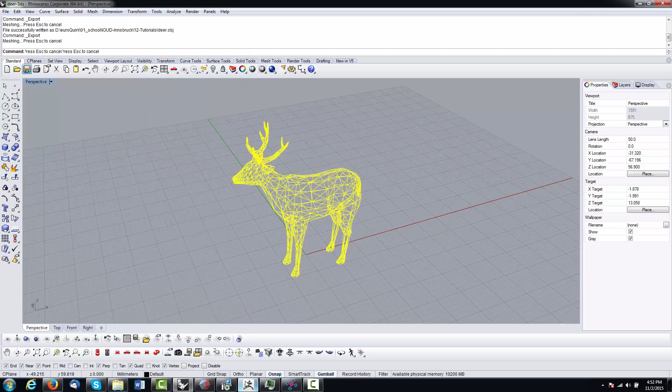We're going to export the deer as an OBJ to bring it inside ZBrush. It's inside ZBrush now. Simply go to the right corner, import the deer. When it comes in, hold down the center with the left click of the mouse and drag it to the middle.

Now you're going to want to edit. Either click this button up here or hit T. Now we're going to remesh this guy at 50, down to 0 polish, and remesh. Now we see we have a voxelized deer.

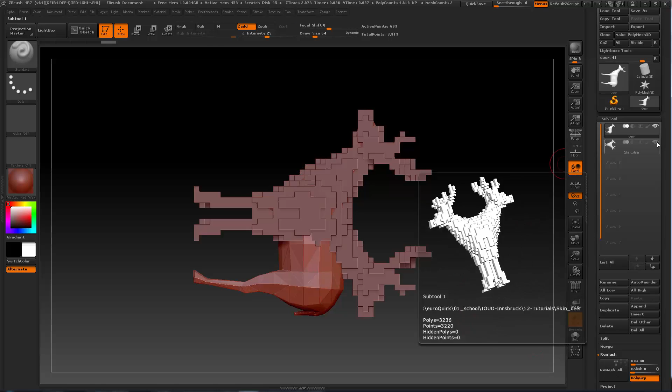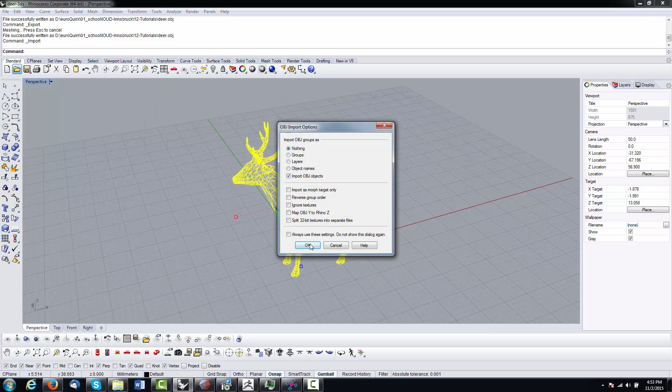So this is our voxelized deer. We're going to export him back out. Deer skin's fine. Move it back into Rhino, import the new deer, and delete the old one.

Now we're going to go ahead and check him. Okay, so we have some non-manifolds - we have some problems with the model. We're going to move him over and export him out now as an STL.

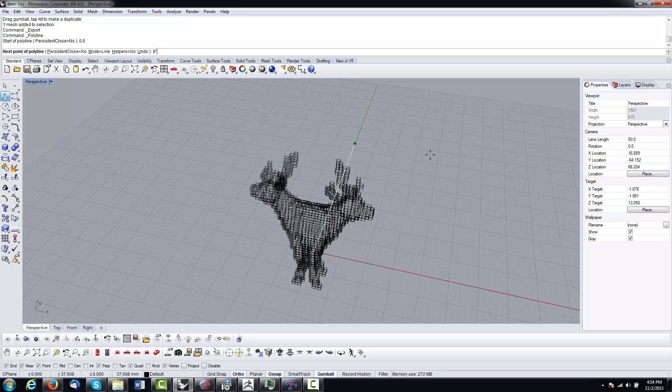Actually, before we do that, the first thing I'd like to say is you need to figure out the size of your 3D printer. I'm going to use the dimensions of a DaVinci, which is 8 inches by 8 inches by 8 inches, and then it is 8 inches tall.

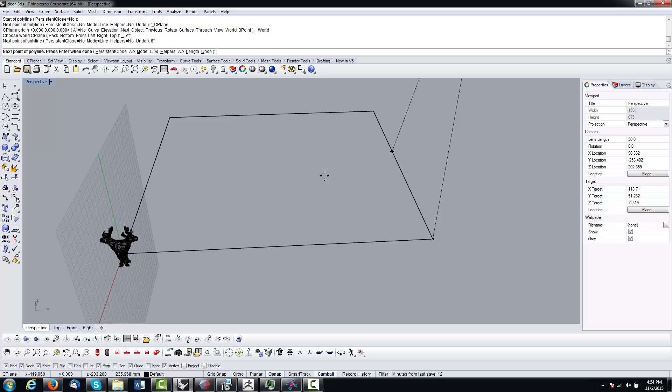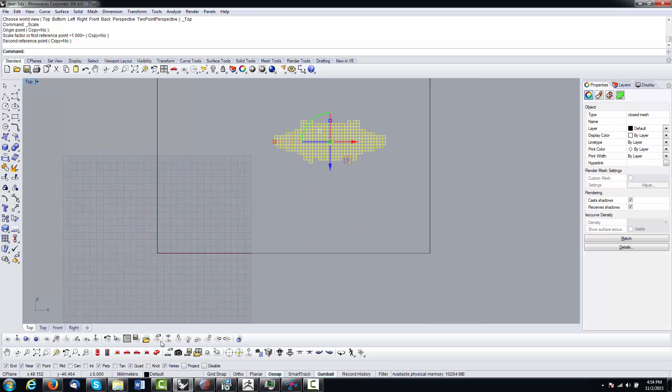So that's basically the size of our 3D print space, and we're going to scale him up. In the beginning, guys, I don't want you to do very large models, so let's say we're going to scale him by his dimension to about that big, so he'll sit pretty much in the middle of the 3D print.

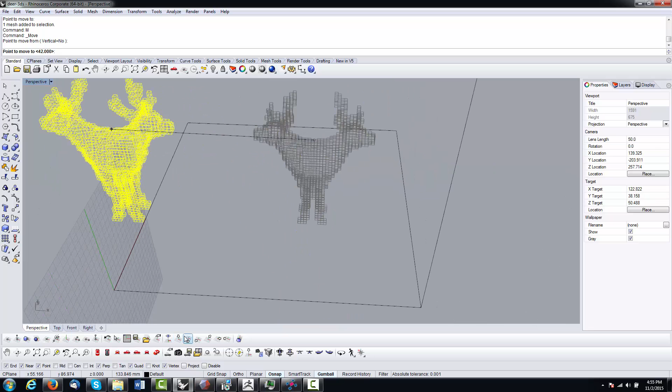We're going to move him up to the 0 plane. We can move him in the middle - midpoint, there we go. So now he's ready to be exported. It looks like he needs to be in the middle over here a little more.

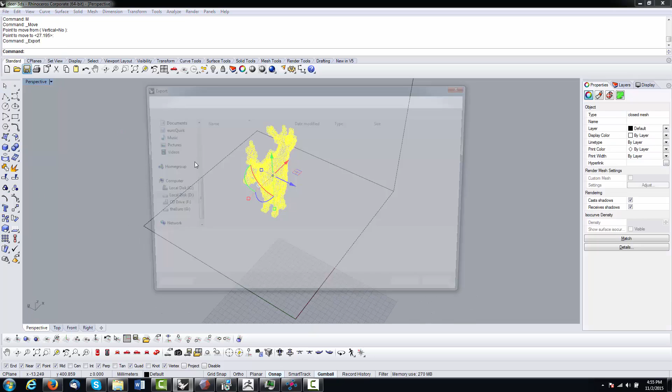Now we're going to export him out of here as an STL. Just call it deer print.

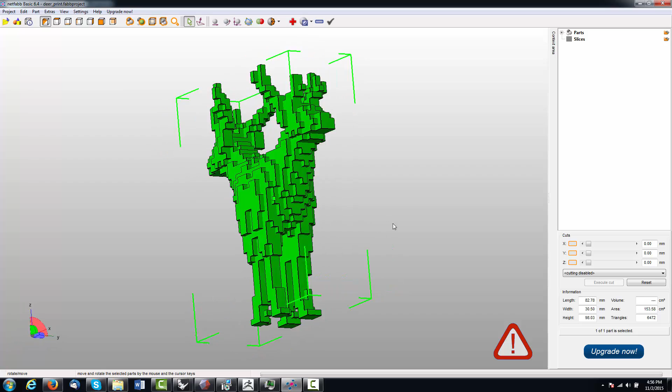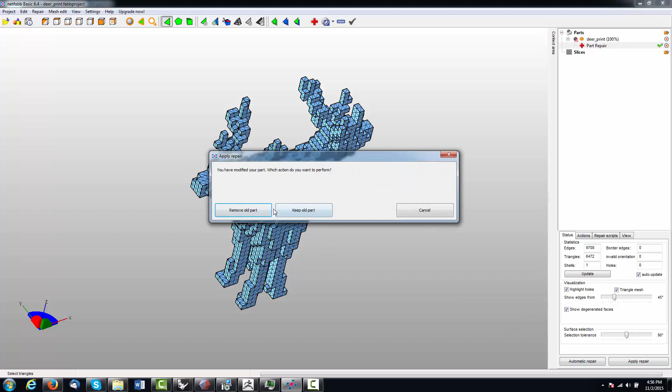Up here we're going to go to repair, and it's going to come up on the right, and we're just going to hit automatic repair. Default's just fine, and see, it looks like it repaired a couple of things. Apply repair, remove old part. Okay, so now this is the repaired piece.

Now what we're going to do is also slice him a little bit. You see this thing over here cuts. If you look correctly, you can see where it is, and you're going to want the middle of the model. I think we're going to slice it in half right here, so we have two sides. Kind of want to think about where you want to slice it.

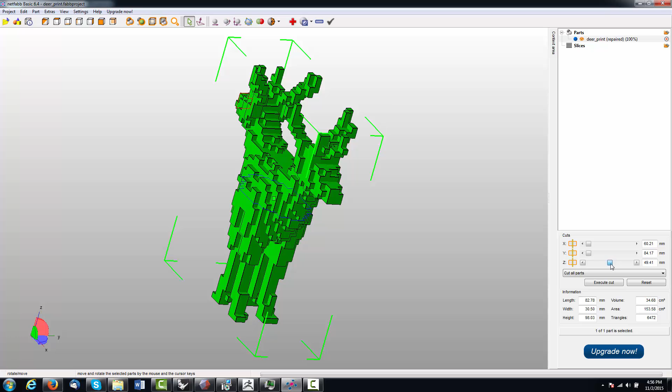Execute cut on the Z plane right there, and then now you're going to apply the cut. Now as you see up here in your parts, you now have 2 slices of a deer.

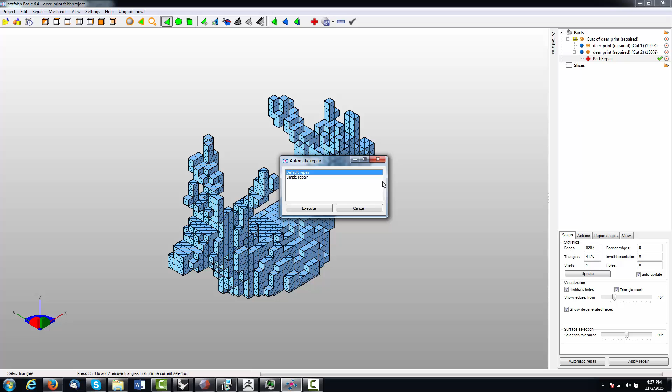Now you're going to need to rerun the repair on this guy too. Auto repair, execute - alright, that one's good now. Remove old part, same thing on the other one. Auto repair, execute, apply repair, remove old part.

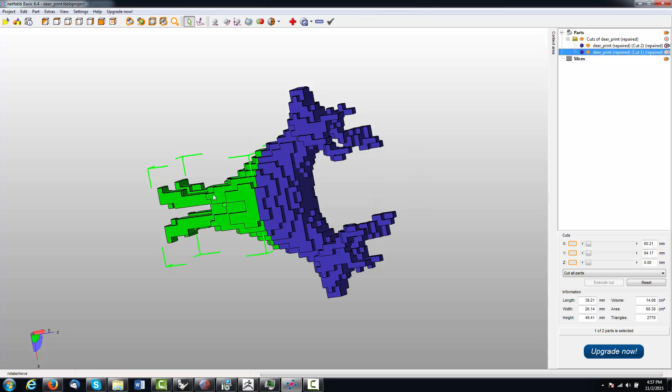Now we're going to export those parts out. Part, export part as STLs. It's going to go ahead and optimize, export, and do it to the other one too.

Optimize, export. Now we're going to open up Meshmixer. We're going to import part 1, the cut 1 - there it is.

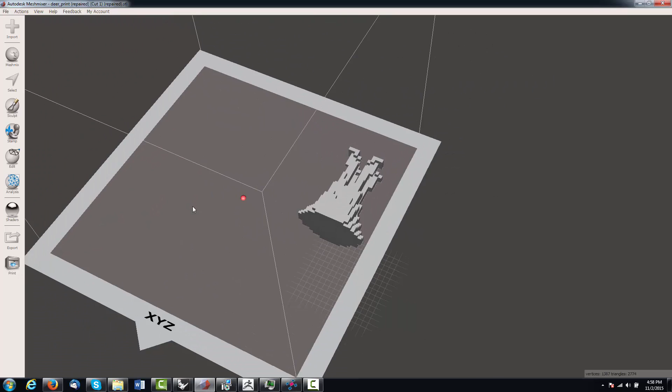Now we're going to import the other part, part 2. There we go.

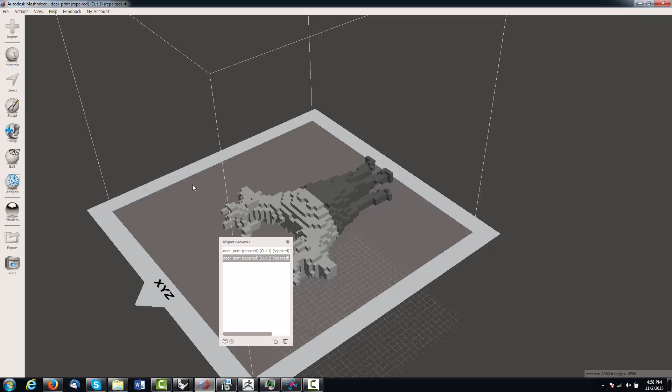Now what we're going to do is go to print. So now see, I have my print set up. You can set up your printer in here under preferences, under printers, you can pick your printer that you're using or add a new printer with the default of the system. But we're going to hit print.

See, now it's fixed in the middle a little bit. On the first one, we're going to see they're both repaired, it seems. Both models seem repaired. We're going to transform, move to platform, and hit done. And do this to the other one.

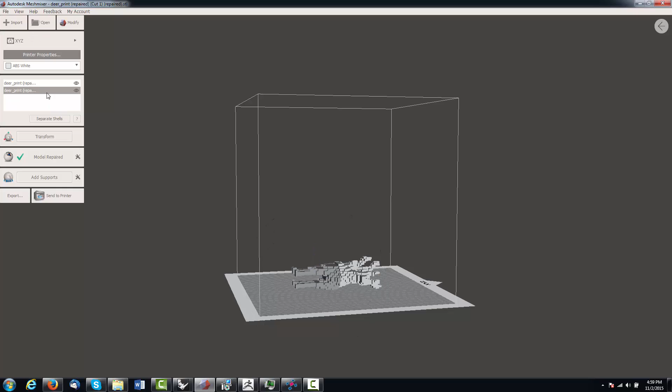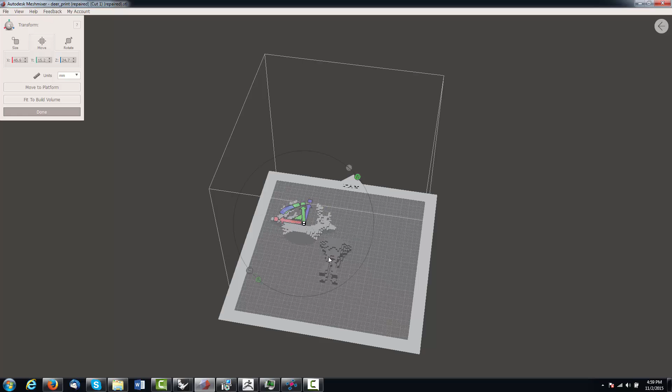Move to platform. Now they need to be moved apart a little bit. You can do this by the toggle here a little bit, and then we can move them over. You're going to always want to stay within a certain distance away from each other. There we go, done. They're both separated on the platform.

Now what we're going to do is add supports. It's going to add - you're just going to have to sit here and let it wait. Give it a second. What this does is it does fairly good supports that are stronger than the supports you'll get from any other software. They're absolutely a lot better.

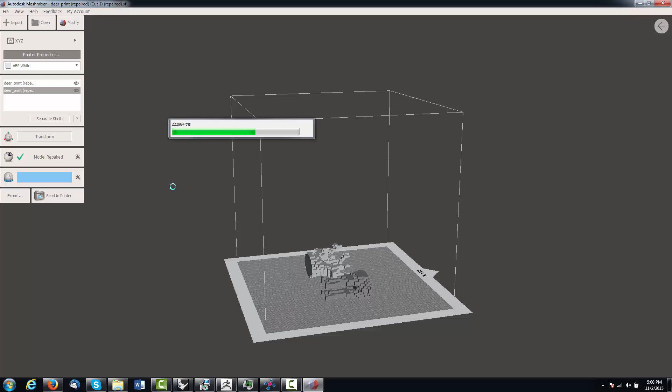In certain cases, if you print this with a raft, you don't need the other support parts - you can just use these alone. And see, we have here the supports that came in, and that should be good for that one.

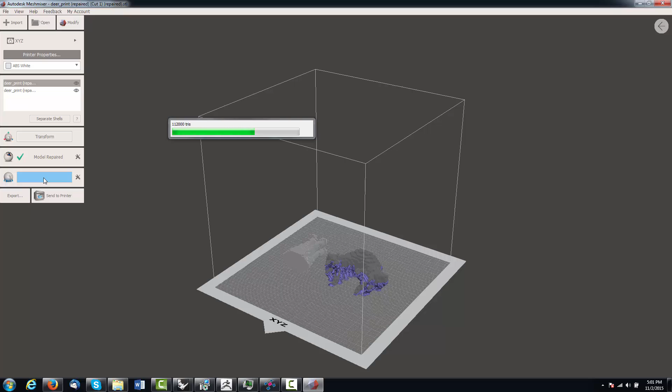Now we're going to do that same thing to the other part. Add supports. There we go. Alright, as you see now, both of the parts are ready to go.

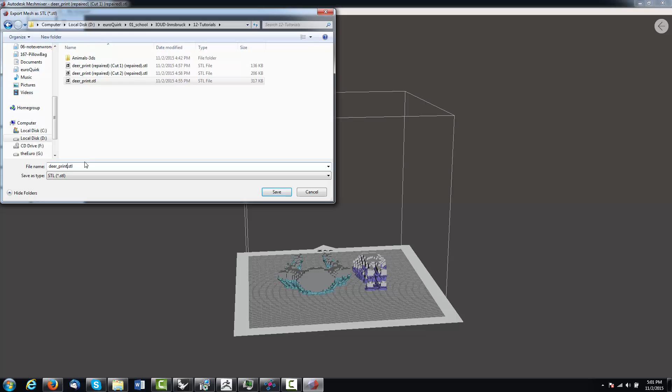We're going to go export. Say deer print A. And now we're going to export the other part.

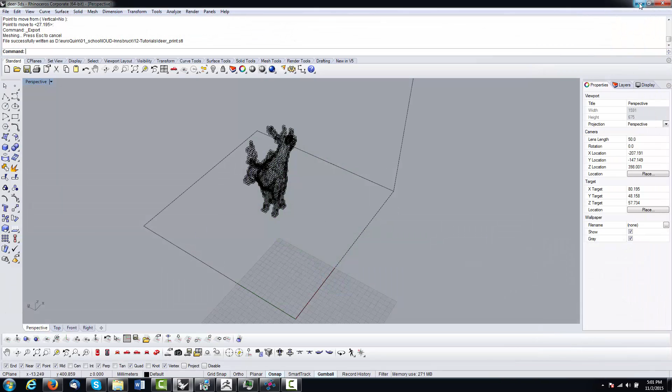So I got both of them already, so we're good to go. We can go ahead and close down the stuff. We don't need to save because we've already done the part, and then we're going to bring it back into Rhino. Move this over just to double check if everything came correctly.

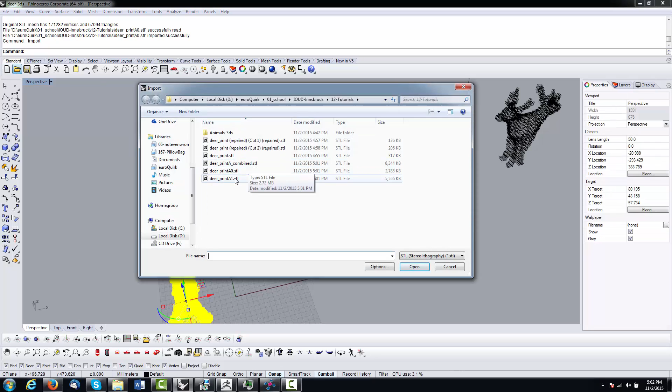And you look at part A - of course, it's going to be in millimeters. And then we're going to import part B. As you see, the meshes came in with the new supports, and they fit fine the base.

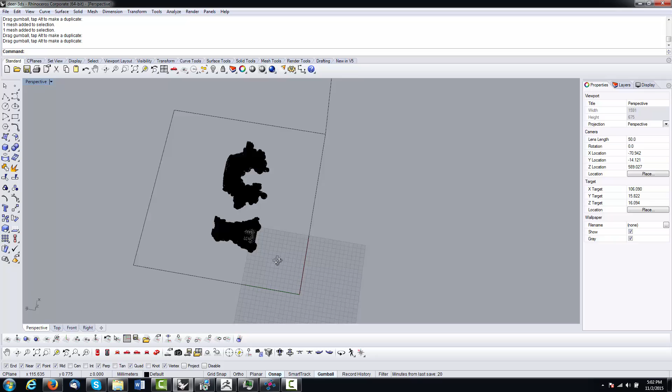And that is how you prepare a print, and that should be printable on any printer. And you can upload that directly to 3D Hubs, and you're ready to go.